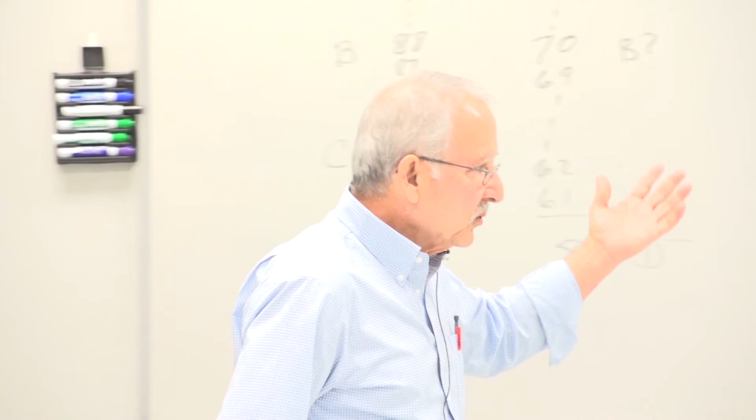As I said, today we will review the materials of ME218 and ME219. And rather than me going through something that I think you should hear, I would like you to tell me what you would like to be reviewed.

What is it that's murky? What was it that you didn't quite understand? Obviously, in less than an hour and a half, we can't go over the two courses in much detail, but we can pick a few subjects, 2, 3, maybe at maximum 4. In the previous class, I did 3. So we can pick subjects and then review those. But I want it to be the subjects you want reviewed, rather than those I would like to review.

Tell me what subjects you want reviewed. Finding stresses from strain values. In other words, the stress-strain diagram, is that what you're talking about? That's very simple, we'll do that.

Okay, what else? Mohr circle. Mohr circle, okay, let's write that. That's always one of the choices. What else?

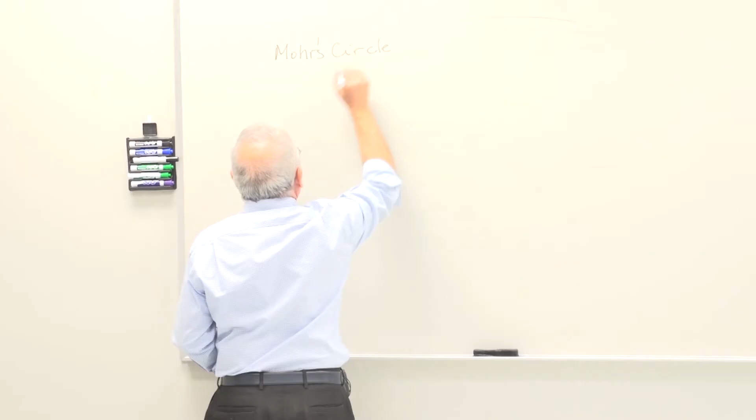So if you don't want any other subject reviewed, if I give you a quiz right now on combined loading, it's okay, right? I doubt that. So again, don't be bashful, you have to answer my question. You don't have to really, you can just sit there and look at me. But remember, if you don't answer my questions, I don't know what you don't know. You have to tell me what you don't know, or what you got questions on, and we'll answer those. So, anybody else want to be brave enough to say something?

Combined loading. I'm sorry? Combined loading. Combined loading, okay.

Anything else? Castigliano's theorem. Castigliano's theorem we will do in this class, independent of what you studied. In fact, the emphasis will be on Castigliano's theorem. Anything else? Transverse shear and bending. Transverse shear and bending, okay.

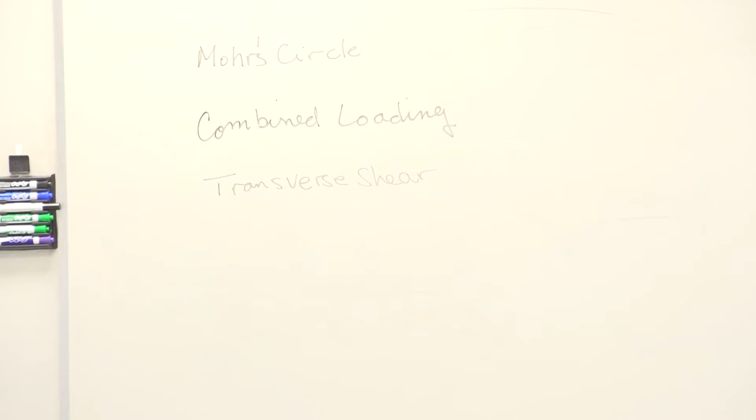Okay, let's take a look at these, and if we have more time, you can come up with other subjects as well. Take these one by one. Actually, I'll answer your question first, because that's simple enough.

If you're asking how we find stresses from strains, and if I have misunderstood your question, please let me know. That's a stress-strain diagram for a ductile material. A part of that diagram is linear and elastic. In other words, when you load the material in this section to some value, there will be some strain associated with it. And if you unload it, the unloading will be exactly on that very same line. So that when you completely unload the material, there will be no effect on the material properties. It is as though you never loaded the material. It's as good as it was before.

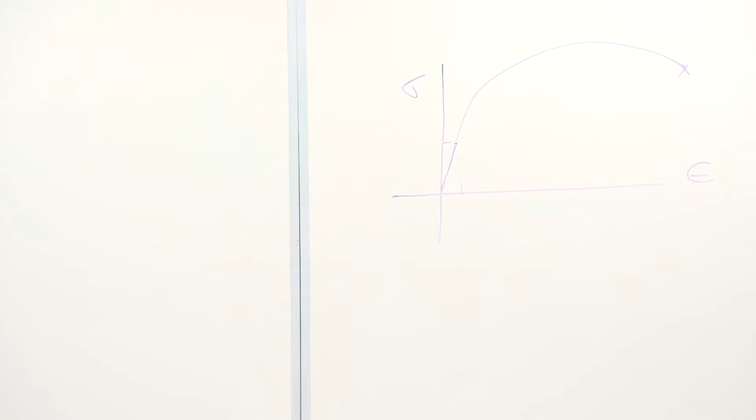If you go beyond a point, actually there are 3 points. One is called proportional limit, the next one is called elastic limit, and then we define this third point as the yield point. In a stress-strain diagram such as the one on the board, it is conventional, it's arbitrary—well, not arbitrary, but conventional—that we say the yield strength of the material is a stress for which the strain is 0.2%, 0.002. It's called 0.2% offset yield strength. And that's what we use.

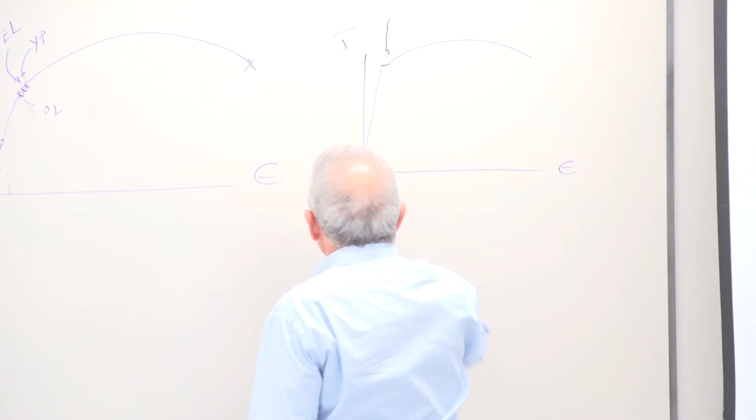The stress-strain diagram in the material may look like this as well. If you're in this, you just passed that point, you have definitely passed the 0.002 mark. So we say this is the yield point of the material. And there's a little upper yield point and lower yield point. Those of you who have taken materials, ME315, probably saw that in your studies.

If the stress or strain is in the linear elastic region, then you can use this equation, where E is the slope of that line. That's where stress and strain are proportional. So if you have strain, you can use that equation and find stress, and vice versa. Alternatively, if you know the value of the strain, you can put it in here, come up, and read the value of stress. Either of the two will give you the answer.

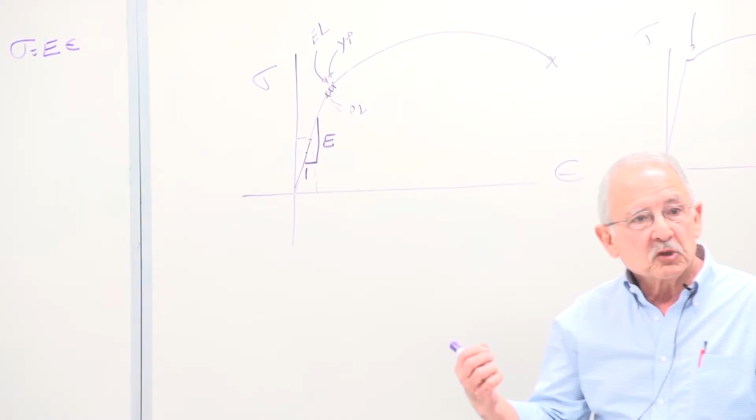This one probably with some approximation because you're going to have to read a curve. That one, I don't want to say it's more accurate, but you'll get a number that matches the equation. If, however, the strain is not in the elastic region, you have strained the material past the elastic limit and the yield point, and you're out here somewhere, that equation is no longer valid. You cannot use that equation anymore. The only way to do it, if you have the stress-strain diagram, is go up here, come in here, and read the value of, let's say, sigma 1, epsilon 1.

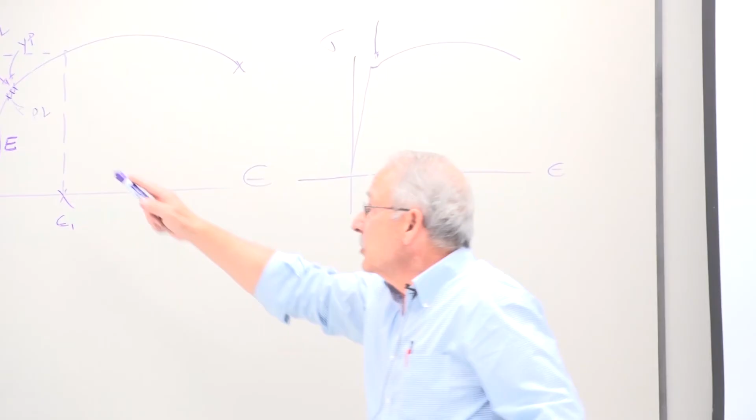Is that your question? Yeah, that's what's wrong. Thank you. Are you sure? Okay, all right, but that's about it. Just make sure you don't use that equation in the inelastic region. You have to use the graph, or sometimes you find actual equations for that part, then you can use that equation. Of course, it will not be linear, it will be a nonlinear equation. But you can use that equation. Okay?

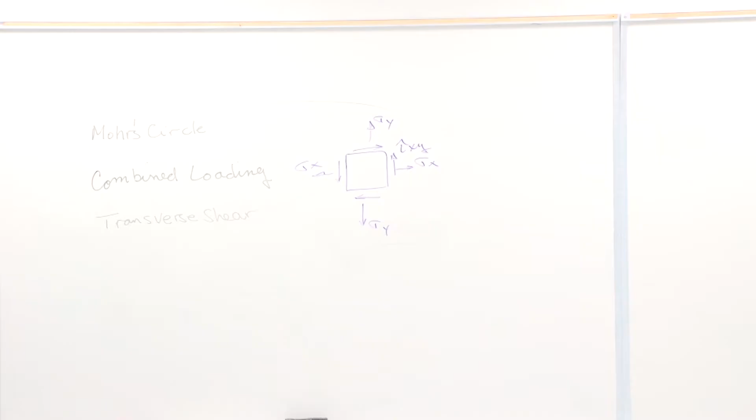These are stresses where you solve for a point, whatever critical point you will. These are stresses at one point in the material, not an overall stress, just one point. So this square here shows you a point, similar to this.

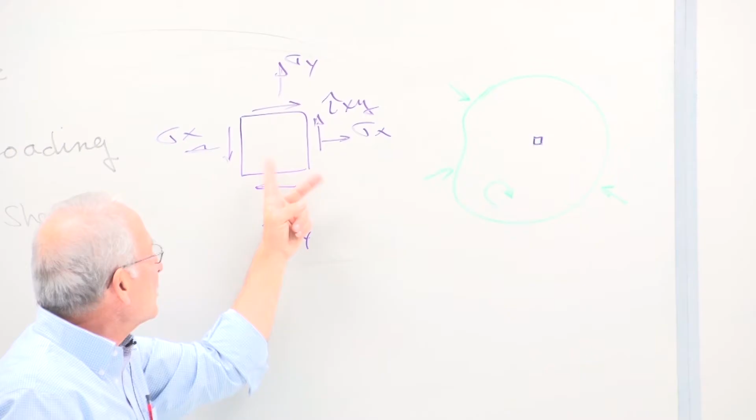Let's say you have all of these forces acting on this object, whatever it is. We pick this point and represent it by this little square. The stresses on the sides of this little square are shown here. These dimensions are very, very small. This is a point. So arbitrarily, we've taken our x and y axes like this: horizontal x direction, vertical y direction. Agreed?

But what if, instead of drawing a square like that at that very same point, I draw the square like this? I don't want to draw it right on top of that point, but this is for the same point. What if instead, I draw a square like that, and here are my axes, x prime, y prime. That's that very same point.

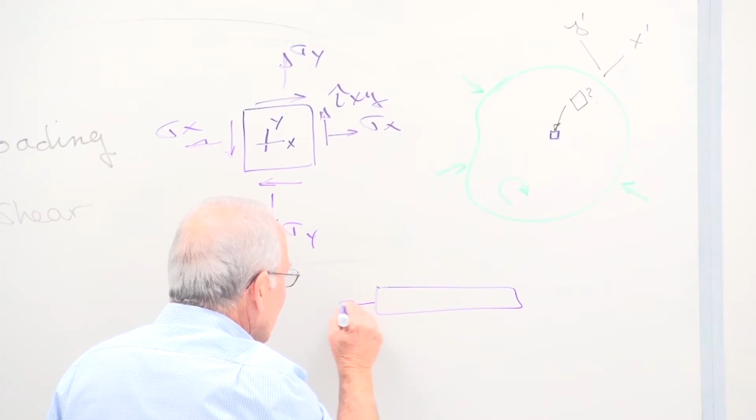I'll give you a simple example you're all familiar with. If this is 10 KSI stress, and I make a cut here, and I take a look at this cut section, what's the stress here? 10 KSI. Because assuming the dimensions have not changed, it's the same force being transmitted from here to here, and that creates the same stress if the areas are all equal, F over A.

But what if, rather than making this cut, I make that cut? Now I'm looking at this. I have these two stresses, this is my x prime and y prime direction shown there. This normal stress here, call it sigma prime, tau prime, is no longer equal to 10 KSI. It's something else. And as I change this angle of cut, theta, let's say, that stress changes. Therefore, the normal stress and the shearing stress are functions of this angle.

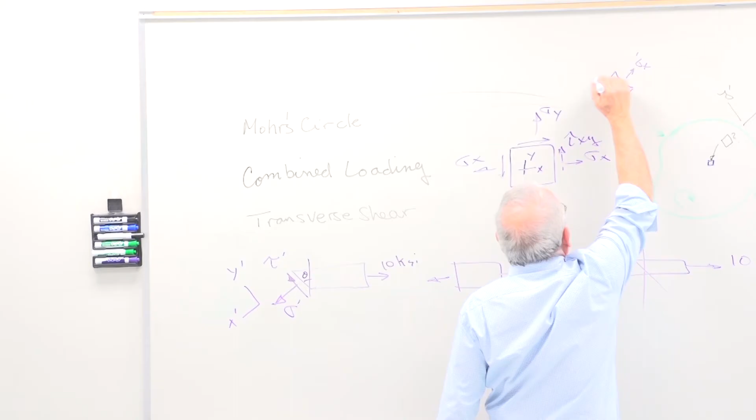If we can go from this set of stresses to that set of stresses, something like sigma x prime, sigma y prime, and tau xy prime, and the same on these sides, of course, if I can come up with a set of equations that will take me from this set of stresses to that set of stresses, I will have found the transformation equations for stresses. So these are all stresses at the same point at various angles, and the transformation from one set to the other is called stress transformation.

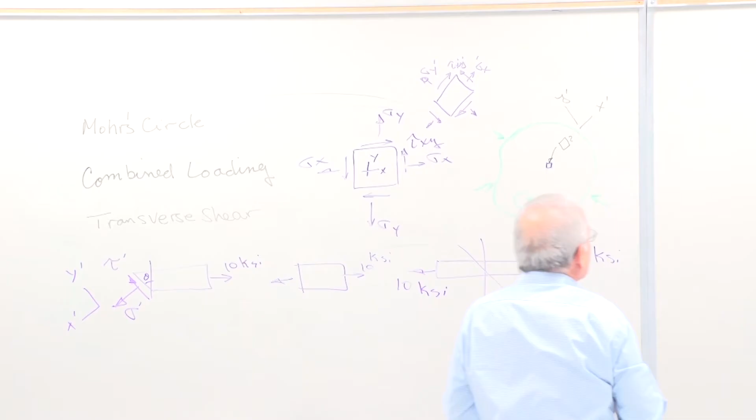How do you do that? Well, pretty simple. All you do is you take that element and say, what is this angle here? Theta with the vertical, so there's the angle theta. And we take a look at this little triangle. We have sigma x, tau xy, sigma y, sigma x prime, tau x prime y prime. This is all at one point. Once we look at it like that in these directions, once we look at it like that in those directions, but it's all at the same point.

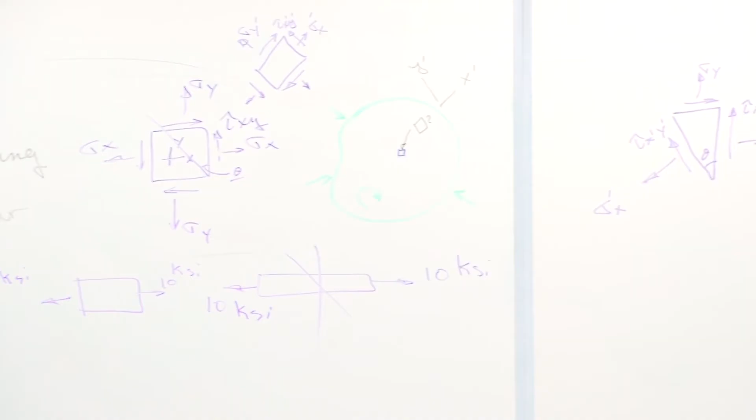To get to the transformation equations, all you have to do is use equilibrium equations. This tiny body here, which is at a point, must be in equilibrium. And remember that equilibrium means the summation of forces are zero, not stresses. Don't add stresses, you must add forces. Meaning that if you want to use equilibrium equations, you have to multiply each stress by its respective area on which it acts. So for example, to find the force that acts on this area, you multiply sigma x by this area. Remember that this is an area into the board.

You say, well, what are those areas? Well, really doesn't matter that much. I can call this area A, then that area would be A cosine theta, and that area would be A sine theta. The thickness is the same in all cases.

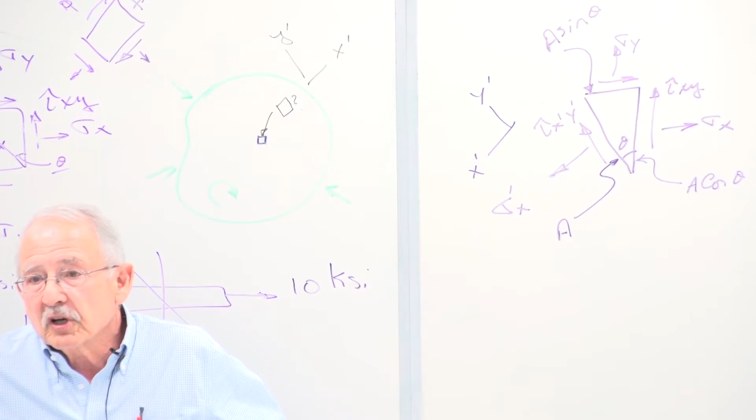You multiply them by the respective areas, write an equilibrium equation in the x prime direction, and write an equilibrium equation in the y prime direction. In each of those two equations, there will be one unknown. In the summation of forces in the x prime direction, sigma x prime is the only unknown, and the other unknown stress will have no component in that direction. In the summation of forces in the y prime direction, there will only be one unknown, and this will not have a component in that direction.

So when you write these equilibrium equations, square them, add them together, and simplify them trigonometrically, what you will find is the equation of a circle. That circle is called Mohr's circle. All it does is represent the results of these equations, called transformation equations, graphically, and make the solution of problems a little bit simpler. Rather than using those equations, we use Mohr's circle.

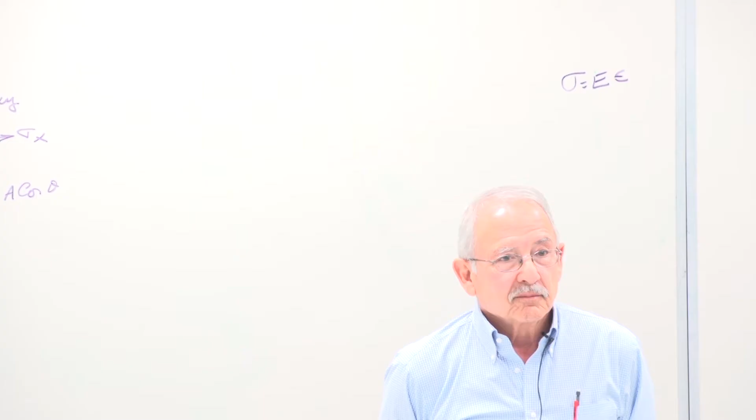So, if we have a set of stresses like that, and we want to find these, here's what we do. Take a set of axes, sigma and tau, and we plot the stresses at this point on the vertical plane and on the horizontal plane. On the vertical plane, there's a normal stress sigma x and a shear stress tau xy.

Normal stresses are positive if they're tension, they pull on the material, and negative if they're compression. As for shear stresses, remember, this is all at one point, so there has to be only one shear stress at this point. There can't be two or three, just one shear stress.

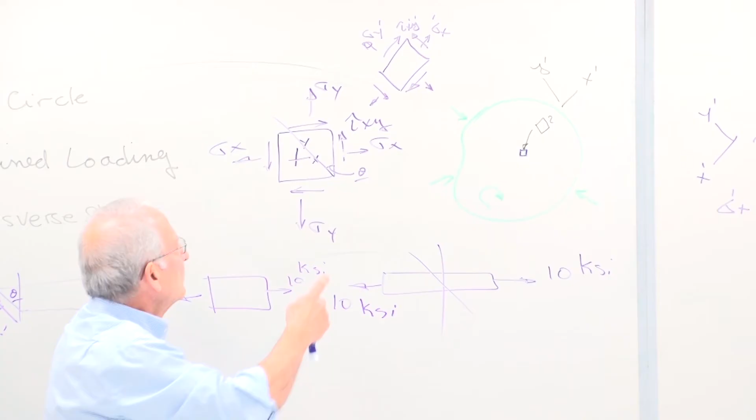But for the construction of Mohr's circle, we have a special convention whereby we think of these two shear stresses as two forces and say: if they produce, about the center, a counterclockwise moment, then they're negative; if they produce a clockwise moment, then they're positive. By that convention, this is a negative shear stress, and that's a positive shear stress. That really doesn't make sense, because at one point you should only have one shear stress, positive or negative, period. But in order to draw Mohr's circle, we use this convention, and it works.

The sign of shear stresses as well as normal stresses—I'll talk about that probably next week sometime. There is a way to find the sign of shearing and normal stresses using the same approach, and you don't have to worry about clockwise and counterclockwise. If you do use that approach, both of these shearing stresses will be either positive or negative, as the case may be. But for Mohr's circle, we use this convention.

Okay, so let's just give these some numbers. Say this is equal to 4 KSI, that's equal to 3 KSI, and my shear stress is equal to 2 KSI. Let me erase the top element so these will not be so cluttered, and this too.

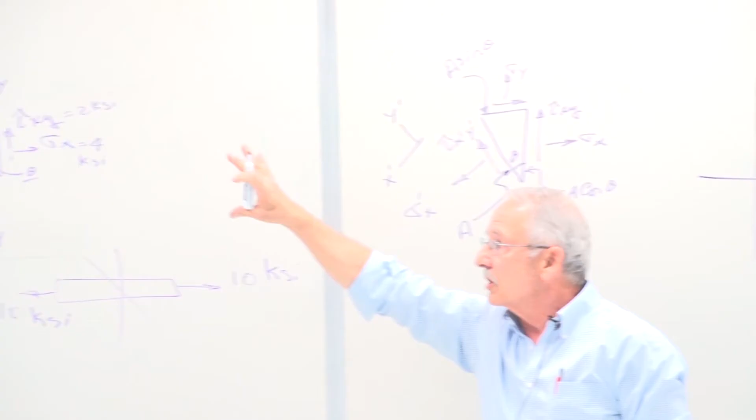So let's draw Mohr's circle for that, and then take a break. On the vertical plane, we have a normal stress of 4 KSI and a shearing stress which, according to our convention, is negative—counterclockwise, sorry, negative. This point, which is a point on Mohr's circle, represents the stresses on the vertical plane. It is sigma x, but sigma x is acting on a vertical plane, a plane parallel to the y-axis, so we'll call this the vertical plane.

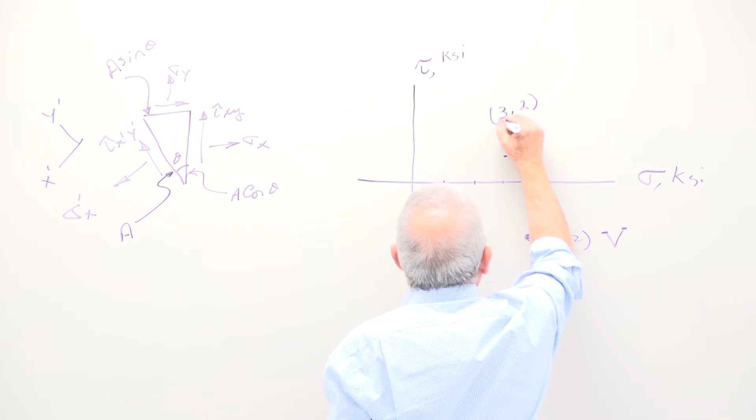Similarly, on the horizontal plane, we have 3 KSI and 2 KSI. This is going to be tight, but that's okay—3 KSI, and that time positive 2. Stresses at these points, 3 and 2, represent the horizontal plane. These two points are the endpoints of a diameter of Mohr's circle. So if I connect these two, and draw a circle like that, that's Mohr's circle.

Just like these two points represent the stresses on the horizontal and vertical planes, all other points on Mohr's circle represent the stresses on all other planes passing through that point. Therefore, if we know the orientation of those arbitrary planes, we can find the stresses on them by using Mohr's circle.

Now let me find the maximum and minimum here, and then we'll take a break. You can see that if I calculate the radius of Mohr's circle—and it's not very difficult to calculate—it's the hypotenuse of this little right triangle. The distance from the center of Mohr's circle to the tau axis is 3.5 KSI.

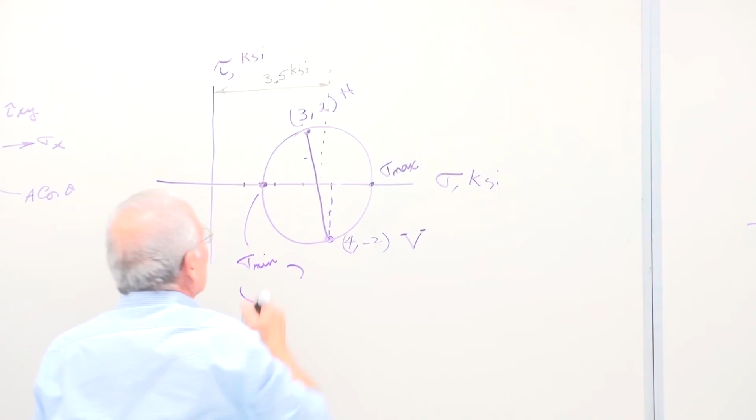Student: The max stresses, those are for this plane, correct? Instructor: Correct, I'll get to that. Student: Are we going to learn plane stress, plane strain later, or is this part of the review? Instructor: This is plane stress. Student: You mean three-dimensional? Instructor: Yes, I'll talk about that today—I'll extend this Mohr's circle to three dimensions. That's why I have parentheses here; these parentheses are for in-plane. Now that you asked the question, we'll put them in.

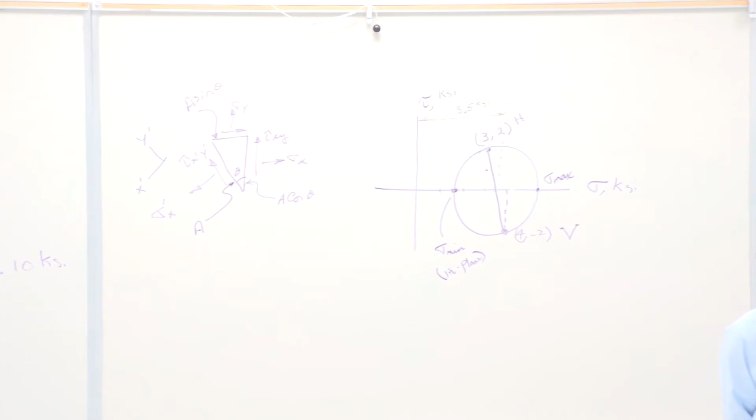We have stresses on other planes as well. The sigma max and sigma min are called principal stresses. So what is the definition of principal stress? We have no shear stress, that they act on planes of no shear. Not that they should be either maximum or minimum.

Although that's partially true, maximum and minimum stresses are included in the principal stresses, because as you can see, the shear stress here is 0. The shear stress there is also 0.

But look at this three-dimensionally. This is our sigma x, tau xy, and sigma y, right? What's the shear stress on this plane, the plane that I have put a circle in?

At that point, this is one point. Remember this, this whole cube is one point. Oh, I thought you meant at the principal, at the angle of the principal stress. No, I'm not looking at the angle of the principal, not yet anyway. What I'm looking at are the principal stresses themselves.

What are they? They're stresses that occur on planes of 0 shear. Correct? They're oriented at some angle here. So if I were to draw them on this, I won't draw them right on it, but probably they would look like that, this on top of that. See, like so. Those would be the planes on which the principal stresses will act. But this is that. This is 4, that's 2, that's 3, and so on.

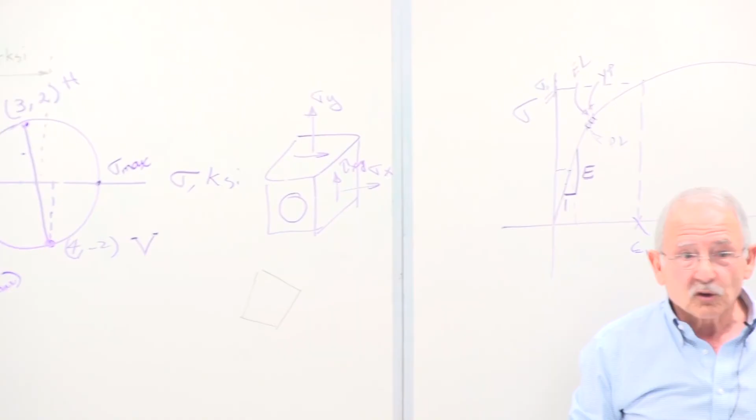What's the shear stress on this plane? 0. You don't see any loads. What's the normal stress at that point, on that plane? Also 0. You don't see any normal loads either. You don't see any loads perpendicular to that plane, you don't see any loads parallel to that plane. There is no normal stress on that plane, there is no shear stress on that point. Therefore, 0 is a principal stress, because it acts on a plane of no shear.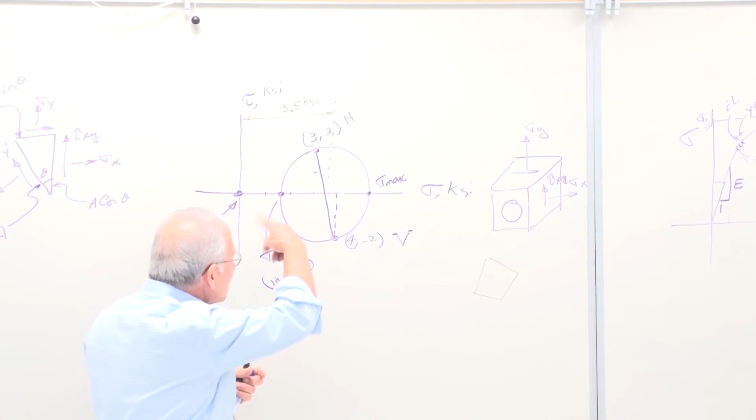So coming back here, that is our real minimum principal stress, not that. And if you take a look at this cube, this element, three-dimensional element, from the 3 sides, for each side you get a Mohr circle.

Before I draw those, one more thing: the maximum shear stress, and I'll rewrite the values for these after you come back from the break, but the maximum shear stress is that, isn't it? That's the maximum shear stress, in plane shear stress.

So if I have these principal stresses, I will have the ends of Mohr's circles. These two have given me one. These two will give me another one. And these two will give me another one.

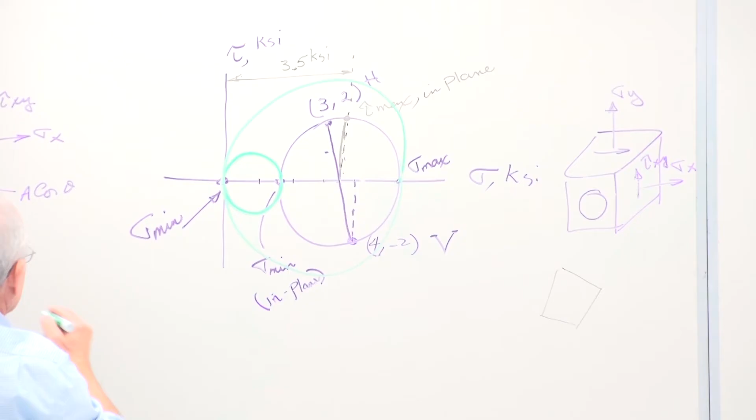And the radius of that large green circle is the real maximum shear stress, not the in-plane one. So tau max is the radius of this big circle. Tau max, therefore, is sigma max minus sigma min, not in plane, just sigma min, sigma max minus sigma min divided by 2. The radius of the largest Mohr's circle.

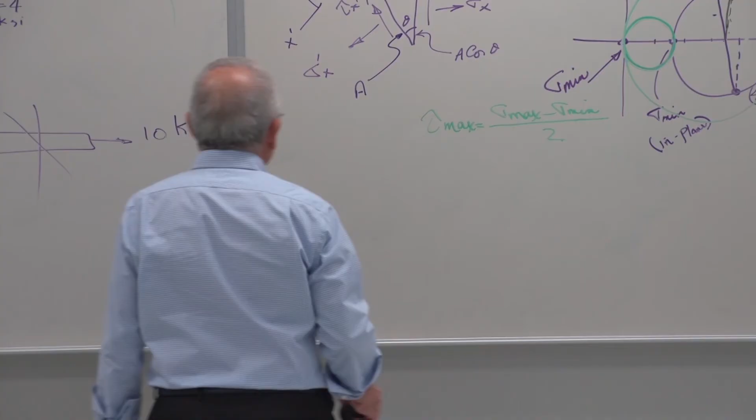Now, any questions so far? The location of the principal stress, meaning the angle at which the plane of the principal stress acts, can be found if we find either of these two angles, either this one or that one. Of course, they're both exactly the same.

So how does that tell us what the principal stress is? Let's assume, and I'm not going to go through finding that angle, that's simple enough in a right triangle, you can do that. Let's say that angle is, I don't want to call it theta because I called that one theta, let's call it alpha.

Then, this point representing the vertical plane, or this radius representing the vertical plane stresses, if it is rotated through this angle, call it 2 alpha, you recall that the angles on the element are doubled on the Mohr circle. Therefore, I'm calling that 2 alpha.

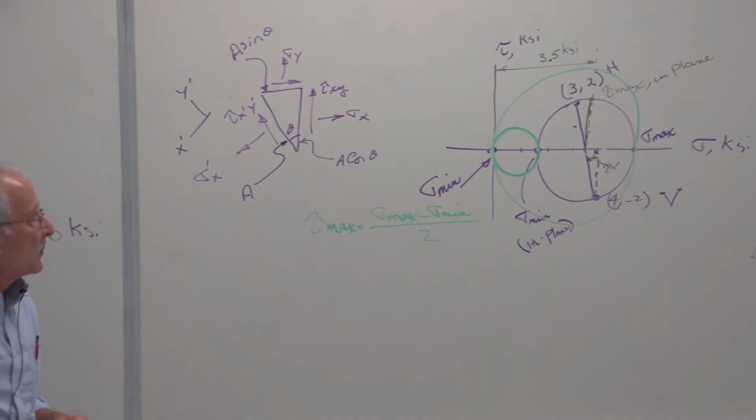If I rotate the vertical plane radius counterclockwise 2 alpha, I will get to the plane on which the maximum principal stress acts. So if I am to draw that here, and notice that I took the vertical plane counterclockwise 2 alpha. Take the vertical plane counterclockwise alpha. Counterclockwise alpha means like this. This is the plane on which the maximum principal stress acts.

Notice that the maximum principal stress and the minimum in-plane principal stress are 180 degrees apart in the Mohr circle. Therefore, they'll be 90 degrees apart in the actual element.

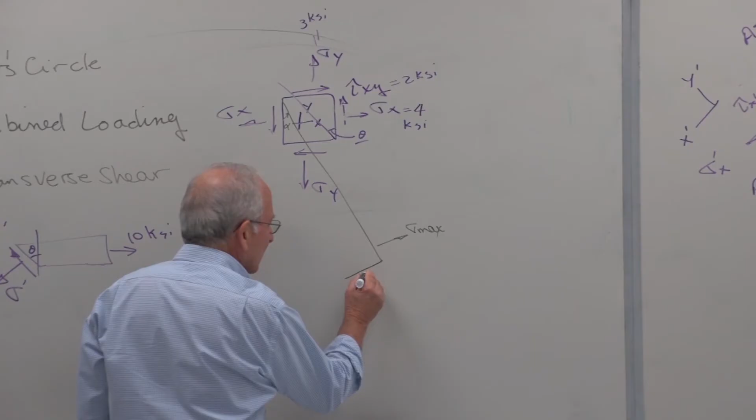In other words, if you were to draw an element, it would look like that.

Sometimes they include the maximum shear stress in this sketch as well, because the maximum shear stress is located 90 degrees from either one of these. That's the in-plane maximum shear stress, 90 degrees from each one, so 45 degrees.

So if I want the maximum shear stress to be shown here as well: 45, 45, sigma max, sigma min, in plane, and the maximum shear stress.

So the maximum shear stress depends on whether you rotate clockwise or counterclockwise. You can come up with the direction. And there's a normal stress which acts on that plane of maximum shear stress, whose value is this, in our case 3.5.

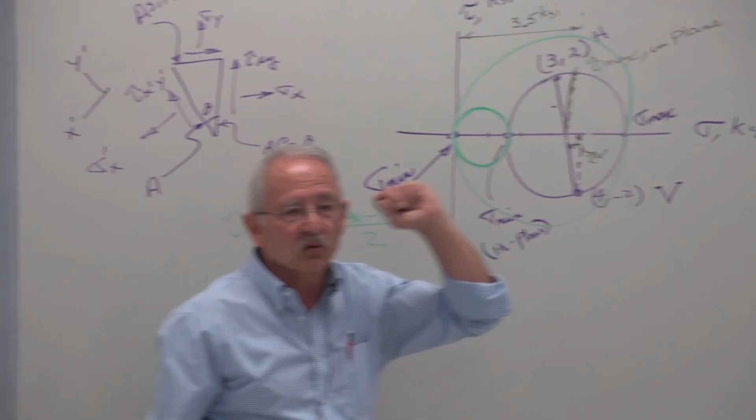The magnitude of the principal stresses can be found again by looking at that in-plane Mohr circle. For example, sigma max is 3.5 plus a radius, sigma min is 3.5 minus a radius. So sigma max, in our case... and of course the maximum in-plane shear stress is just equal to the radius.

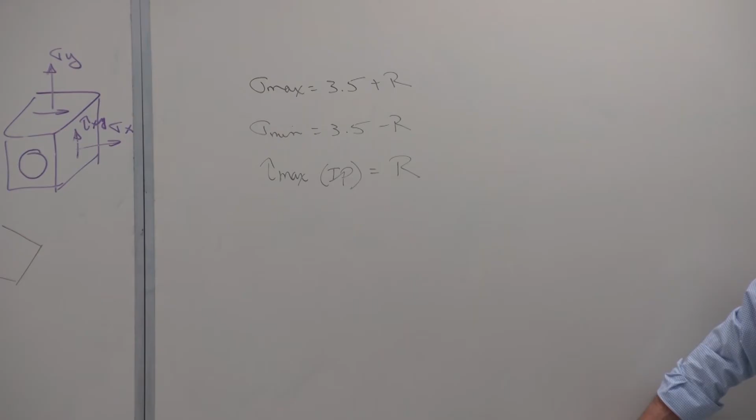Okay? Any questions? Whoever asked for Mohr circle, I forgot. Have I answered all of the questions, or at least the vast majority that there may have been? If not, if there's something regarding Mohr circle that is still not clear, tell me. Nothing comes to mind, huh? If it comes to mind later, ask later. Not a big deal. Next subject, combined loading.

Whoever asked this question, do you have anything in particular in mind? A problem, for example, in combined loading. Who asked the question? You did. Do you have anything in mind? No. Nothing in mind. Okay, no big deal.

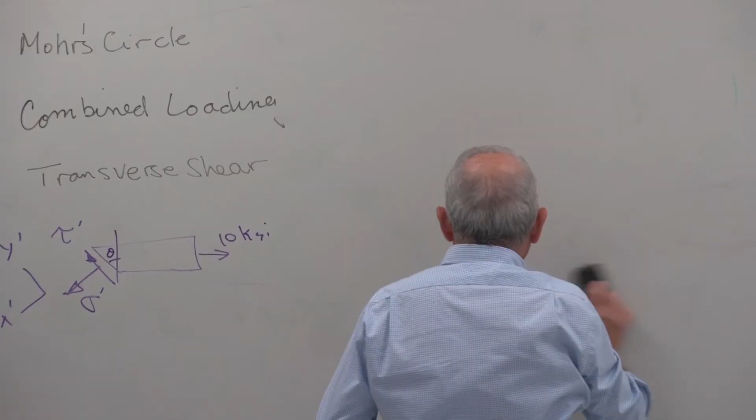Let me then give you a problem. We did this in the previous section as well.

Say you have a shaft like this, and you have pulleys.

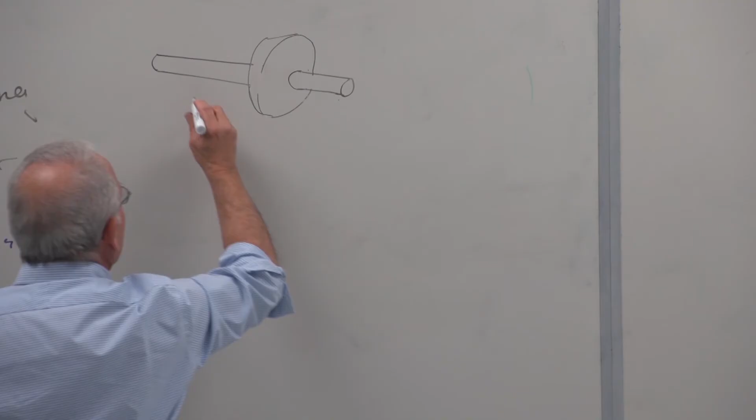You have to live with my artwork, it's not the best in the world for sure, but starting next time I'll be using the projector and things will look much better.

Okay, let's say it's simply supported here and here. And you have loads on the two sides of these pulleys. Just give them some numbers.

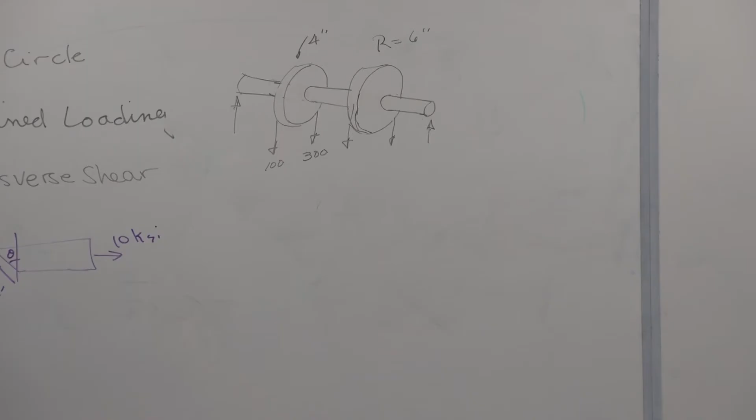Let's say... and let us assume that the radius of this pulley is equal to 6 inches, and the radius of that pulley equals 4 inches. So that's 200 times 4 is 800. Let's make it 8 here so that I can do this.

Forces in pounds, and distances, I'll put them in here like this: 2 feet, 3 feet, 2 feet. Just to have taken some number. Is that clear?

Especially the last part where I'm showing the length along the member. This is the location of the two pulleys. Those are the distances in between them.

One of the things that you have to be sure of, and if given in a problem, for example, something like this, and this load is not given, so F, the first question is, what's F?

Even though this is a shaft and it rotates, it must be in equilibrium. You do know that equilibrium does not mean the state of the material being stationary, not moving. That is not what it means. It can be, but it doesn't have to be. Any motion has to be with constant speed, whether rotational or linear.

So in this case, if it's constant speed, then that means that the torque that's being applied on the two sides by these two pulleys must be equal. So if these are my axes, and if I call this pulley 1 and that pulley 2,

the forces on pulley 1 create a torque equal to 200 times 4 inches. I say radius 4 inches, that's okay. 200 times 4 inches, that's 800 inch-pounds.

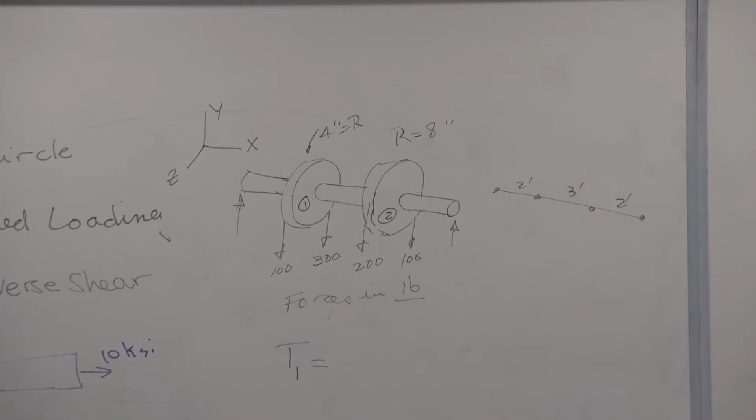And if I were to write this in vectorial notation, what would be the unit vector? Minus I, exactly. Does everybody understand? Okay, good.

Pound, inch, in pounds, all the same as a vector. The torque generated by pulley number 2, by necessity, has to be 800 pound-inch. Otherwise, there will be no equilibrium. The two must be equal.

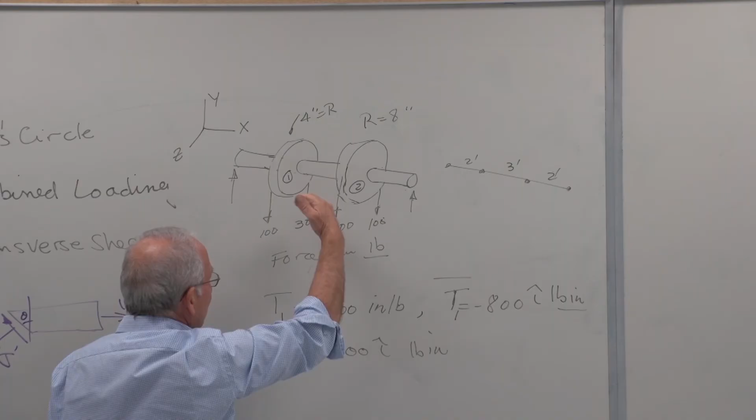So, if only this force is given, you can find that other force. So this is 200 times 8, 1600. You have to subtract 800 from it, so that must be 100. Does that make sense?

That okay with everybody? If you take a look at that, it will also give you 800 pound-inch, except that it's in the positive x direction. Positive I. Okay.

And let us assume that the question is this: what is the location of the maximum stress in this shaft? And what are the stresses at that location?

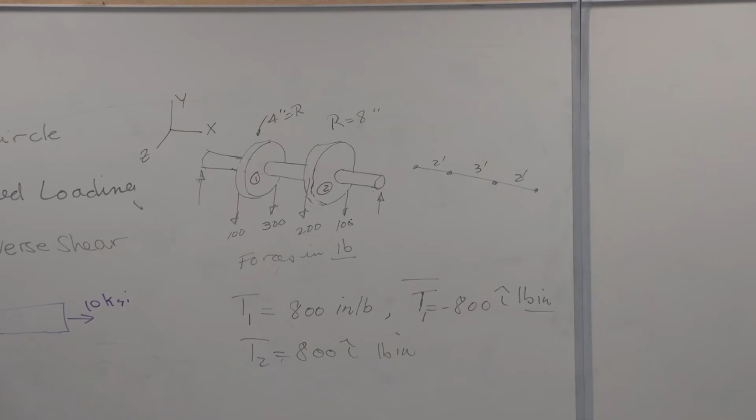By location, we mean cross-section and a point which is usually on the outside of the shaft, because that's where both the shear and the normal stresses are generally maximum. That's not the case if there is stress concentration, of course, but not in this case.

So, if that is the case, what part of the shaft should I be looking at in order to find the location of the maximum stress or stresses? First, what about the shear stress? Where does it act? Maximum shear stress.

I'm not talking Mohr circle, just talking your regular old shear stress from the TC over J equation. Where does it act? Around the center of the shaft? Remember the stress distribution?

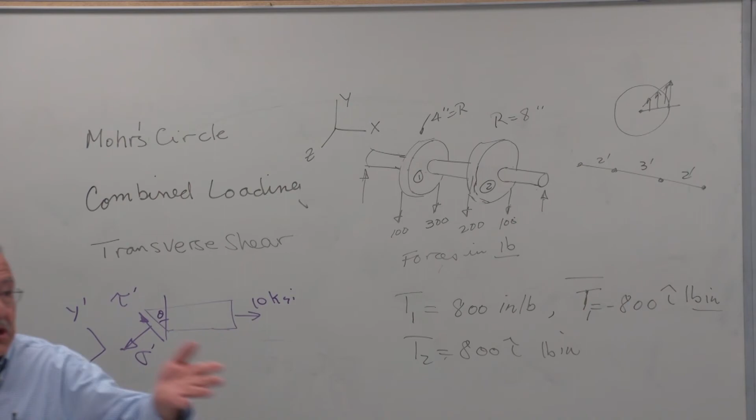At the outside of the shaft. But where in the shaft? Here, here, or any other point in between, or section in between? Where does the maximum shear stress occur?

I hope you're just bashful, because that you should be able to answer. What's the torque here in this section? Zero, there is no torque. That section, zero, in between.

So the maximum shear stress occurs from here to here. It occurs on the left-hand side, immediately on the left-hand side of pulley 2, or immediately on the right-hand side of pulley 1, and every place in between those two.

However, the shear stress is not the only stress that acts on this shaft. There is also a bending moment, which creates a normal stress. In order to answer what is the most critical section of the shaft, not only do we need the maximum shear stress location, we also need the maximum normal stress location. To do that, you have to draw a shear moment diagram.

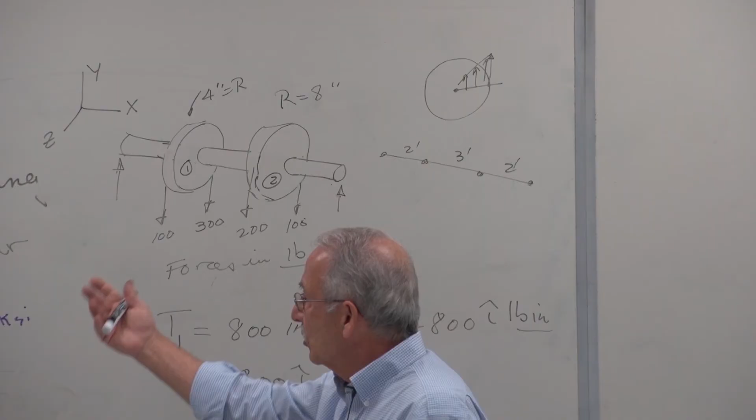So this would be a good exercise in that as well. We draw the shaft like this. And then we have 400 pounds here and 300 pounds there. And this is 2 feet, 3 feet, 2 feet.

You can draw shear and moment diagrams, which is really not that big of a deal. For the shear diagram, you just follow the load. Go wherever the load goes.

First, of course, you have to find the reactions. Let's see, that's 4. Yeah, it'll work for one, but not the other. I want to change those numbers. I don't remember the numbers from the previous section. I want to change those numbers so that we get round numbers for the reactions. If I make that 4, then I get 3 and 1, and if I make that 4, I may get 3 and 1. It may turn out to be okay.

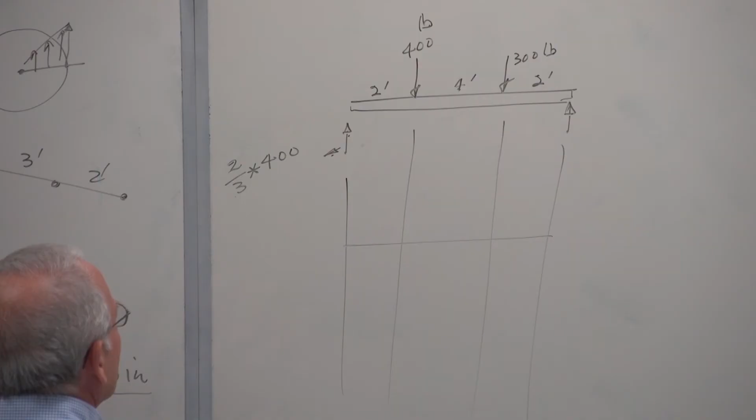Let's see, I don't want to write equilibrium equations just yet. So I'll show you where I get these numbers. That's 6, 2, so 1/3 and 2/3. So this is equal to 2/3 of 400. And that's equal to 1/3 of 400.

Then this will be equal to 2/3 of 300, 1/3 of 300. If you add those two, those should be the reactions. So it's 100 plus 800 over 3. And this is equal to 400 over 3 plus 200 pounds. We'll figure out what they are.

Now that we're on the subject, let me show you how you get that. If you have a simply supported beam, which that is, if this is a force F, this is A, and that's B, yes, you can write equilibrium equations and find the reactions. But if you remember this, the easy way is to say that this is divided between these two supports in the ratio of these two distances. And it's clearly the reaction due to that force is larger at the left side than it is on the right side. Therefore, this will be A times F divided by A plus B.

That's what I've used to come up with that. So I looked at each one of these like that, and for each I wrote its own ratio, and then I added them up. But again, if you're more comfortable with equilibrium equations, that's fine.

Furthermore, the maximum moment, which occurs here, this is the moment diagram, maximum moment is that. All you got to do is cut a section here, and the moment just next to F is equal to A times that, or on the other side, B times that. So those are your moments, the maximum moment and also the reactions for a simply supported beam. This is something good to have in the back of your mind, saves you a lot of time.

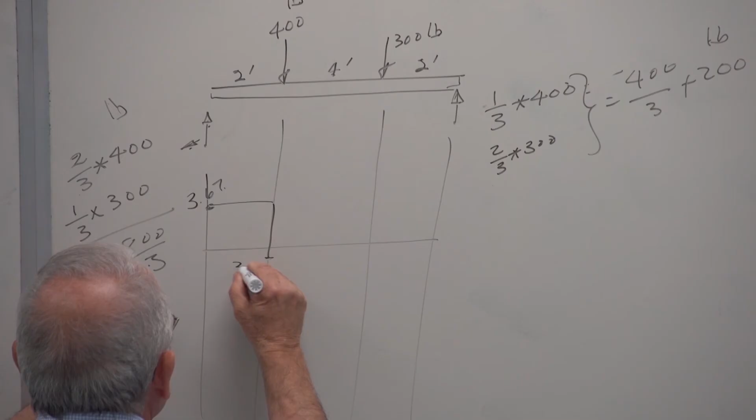So what is this? This is 800 over 3, so it is about 267 approximately, plus 100 is 367. And then from here to here, nothing, so we drop down to 33. And then nothing from here to here, I'm following the load. And 333. The sum of these better be 333. It is, right?

Student: Sir, how come it's 2/3 instead of 3/4? Instructor: I'm sorry, come again please? Student: Because isn't the distance 6 over 8 instead, when you use that shortcut? Instructor: No. Oh, what? Let's see, it's 2/8. Yeah, you're right.

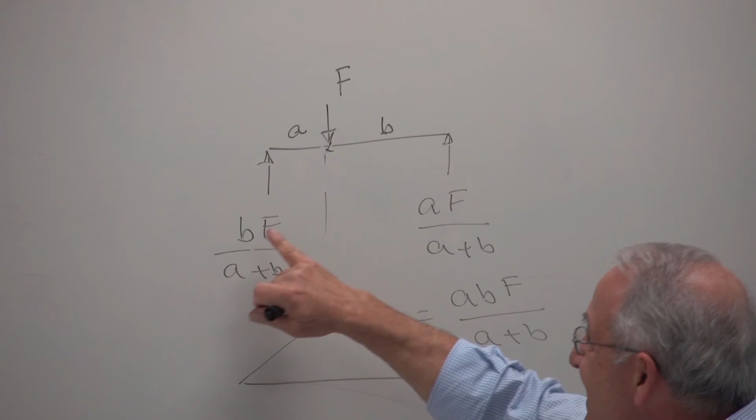I divided it in the ratio of these two. So here's what I did. This has to be divided into these two parts, right? Okay, this one, or this one, is A over B times that one. Ratio of those two, A and B. Correct? So coming in here, the ratio is 2 to 6, 1 to 3, okay, 2 to 6.

And then you do the moment diagram, which now it's actually not difficult to calculate. How do I go from this point to whatever this area, the change in... actually, let me write these for you here. I'll keep that there.

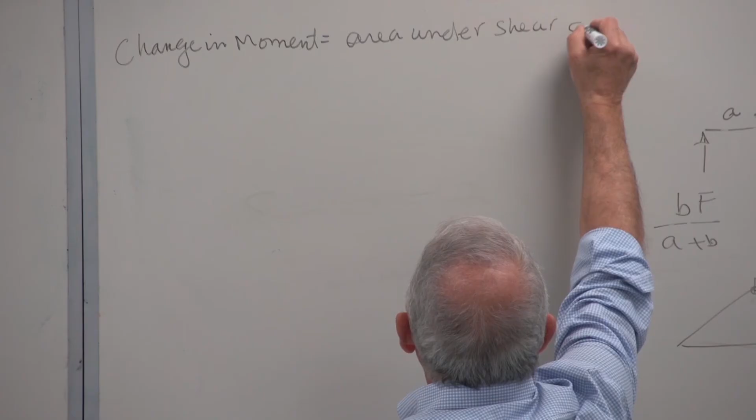Change in moment equals area under shear diagram, right? That's from the shear moment diagram.

So right when we started this problem, we established that there's shear force due to the torque, right? But there's also shear force due to just bending. Yes, there is. Our shear diagram doesn't care about the torque shear yet, right?

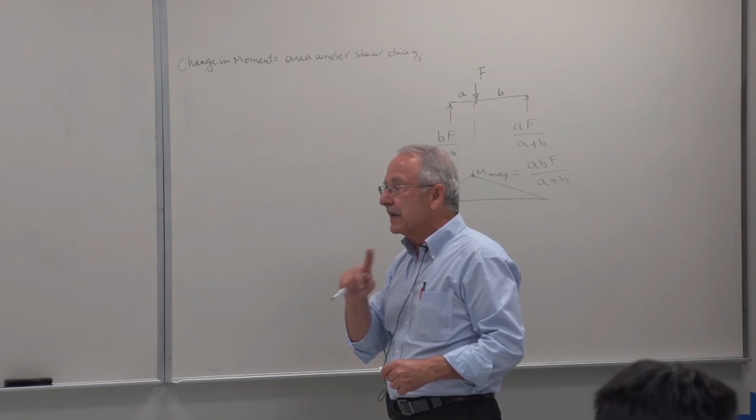There are two independent parts that produce shear stresses. Both of them produce shear stresses. Torque may not be there, but the shear stress from the bending diagram is there. On the other hand, that one may not be there, but the torque is there. But in general, both of them are there, so they're either additive or subtractive, depending on whether they act in the same direction or in opposite directions. That's number one. Number two, the...

Transverse shear, what is the value of the transverse shear at the surface? Zero. It's maximum at the neutral axis, right? What's the maximum value of the shear stress due to torque? Where does it occur? At the surface. Zero at the neutral axis.

Yes, there are these two shear stresses, and in some locations they add to one another. But at the point of interest that we have, on the surface, only the torque has a value. The transverse shear is zero. Remember, it looks like this - the variation of the shear stress. If this is your cross-sectional area, that's the transverse shear. Agreed? So it's zero on the surface.

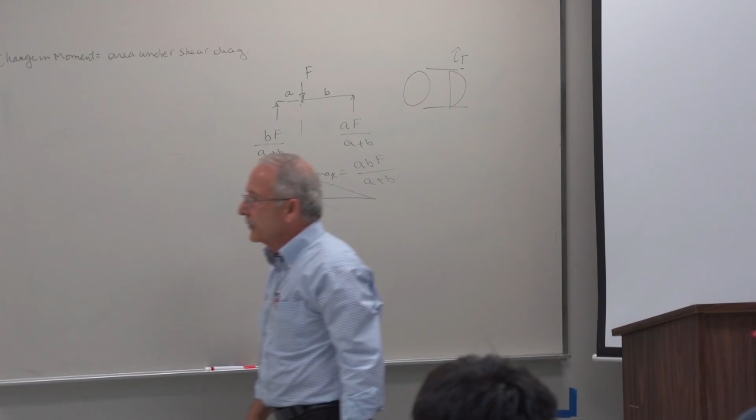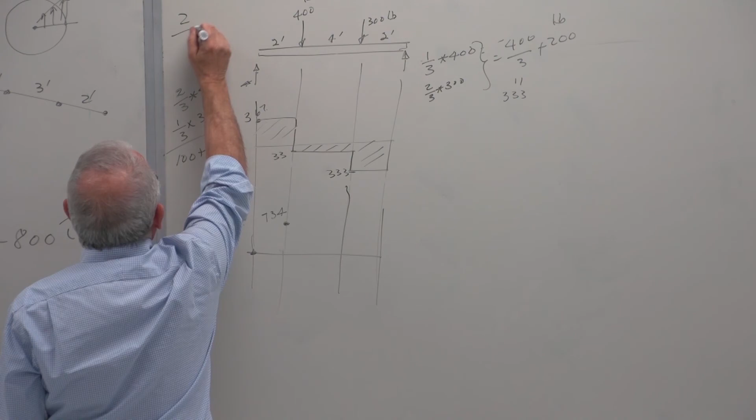Well, let's check the reactions. I believe what you said is correct. It's not 2/3. This one is 2 over 8 times 400. You were right after all.

And from the other one, you get 6 times 300 over 8. A divided by A plus B and B, yeah. In reducing the ratios, I made a mistake. So let's just check this one more time. So that's 800, that's 100. And what is that? 3/4, that's 900 over 4. And 900 over 4 is 225.

Add those two, and rather than 367, we will have 325. Okay, 325. That still won't give us the right answer. Isn't it 6/8 times 400 and 2/8 times 300? 8 times 2 divided by 8, 400 times 2 divided by 8. It's like in reverse, isn't it?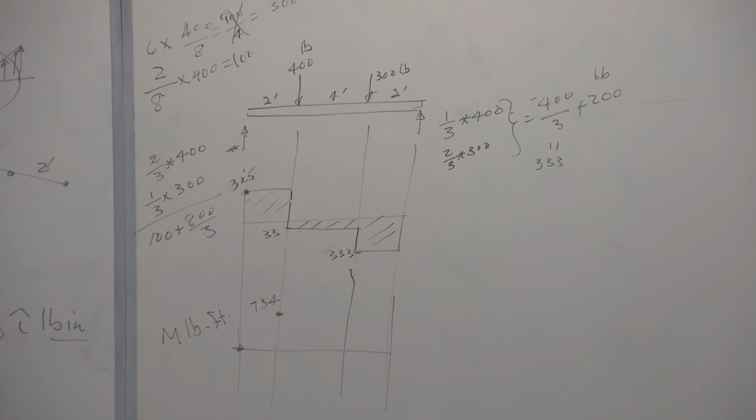400 over 8 and 6 times 400. That's right. Okay, one more time. We get 300, right? Is that right? And below it is 2 over 8 times 300. Yeah, that's correct. So 300, and then this one. Oh, I know, I switched those two. 6 times 400 divided by 8 is correct for that one, and 2 times 300 over 8 is good for this one.

600 over 8. So what do you get if you add those two? Calculator, anyone? Divided by 4 is 150, 75. Check that. Correct? So 375.

On this side, 400, 2 over 8, and 300, 6 over 8. And what do we get here? That's 50, that's 100. That's 100 plus 1800 divided by 8, what is that? Quickly. 2, that's 900 divided by 4, so 225. Is that correct?

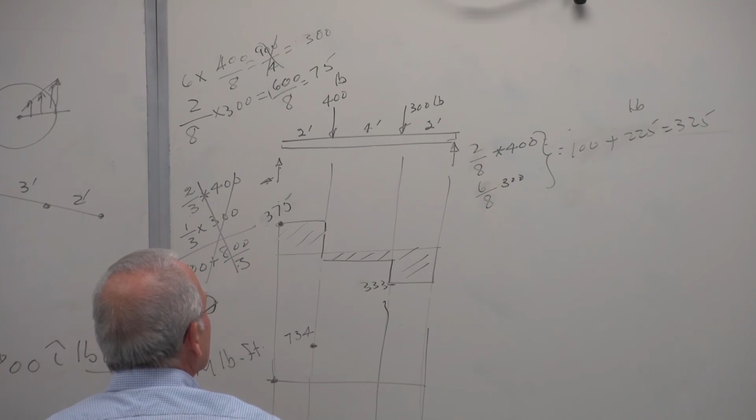Okay, now hopefully things will come out right. So 375, 25, 325. And the maximum moment here is this times 2, which will give us 750. And the maximum moment here is 325 times 2, 650.

Does everybody know where I got those numbers from? This times that, that times that. This times that gives me 325 times 2. 375 times 2 gives me 750. So how do I go between these two points? Straight line or a curved line?

Straight, why? Because the shear force is constant. So we go here, we go there, and then we go there, like that. So continuing on this.

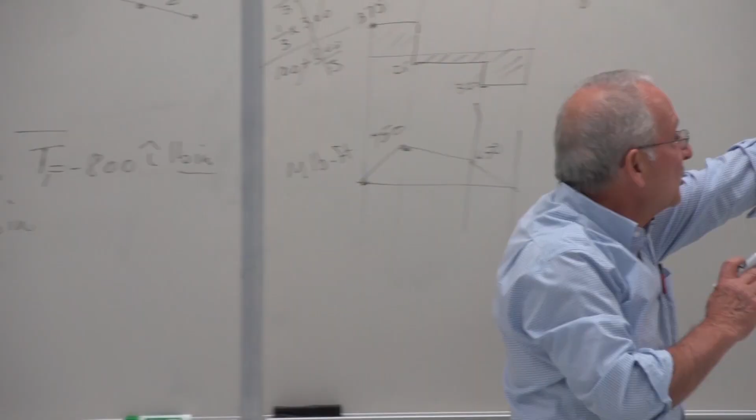Change in shear equals area under load diagram. Slope of moment diagram equals value of shear force. And slope of shear diagram equals value of load.

So the slope of the shear diagram here is zero because there is no load here. This is free of load. Slope of the moment diagram is constant because shear is constant.

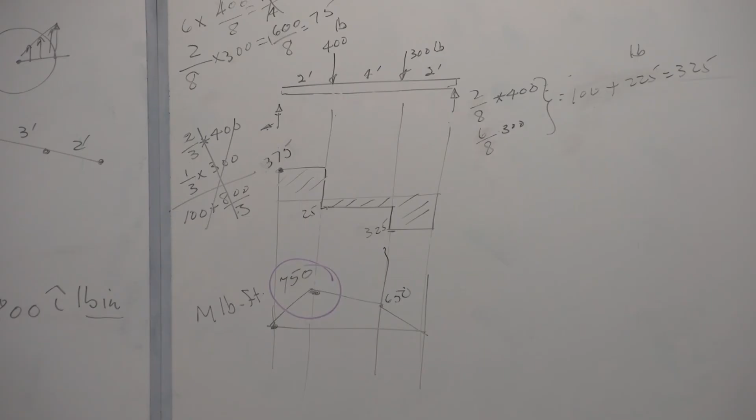So now you can see this is our maximum moment. We said the maximum shear stress occurred between here and here. Since the maximum moment occurs here, then we should be looking at this section, right there on the right-hand side of pulley number 1.

And sigma max will be equal to, in this case, 750 times C divided by I. C and I we don't have because I didn't give you the diameter of the shaft. Once you have these two, and tau, of course, we can calculate that.

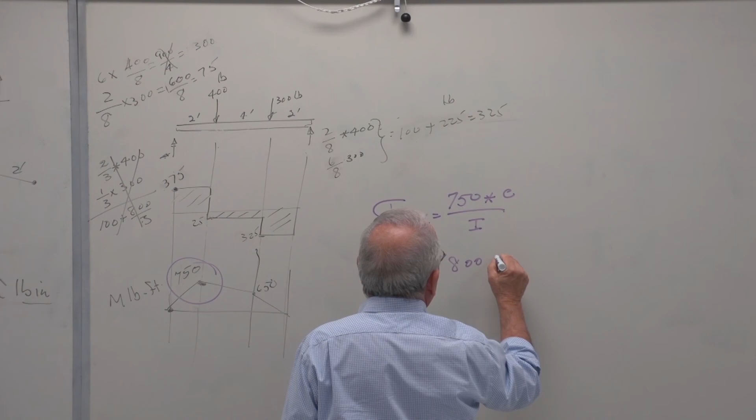Tau max, that means the tau on the surface, is equal to 800 C over J.

Once you have these two, you're back to Mohr's circle with your sigma x, sigma y, and tau xy. Except that, in this case, there is no sigma y or sigma z.

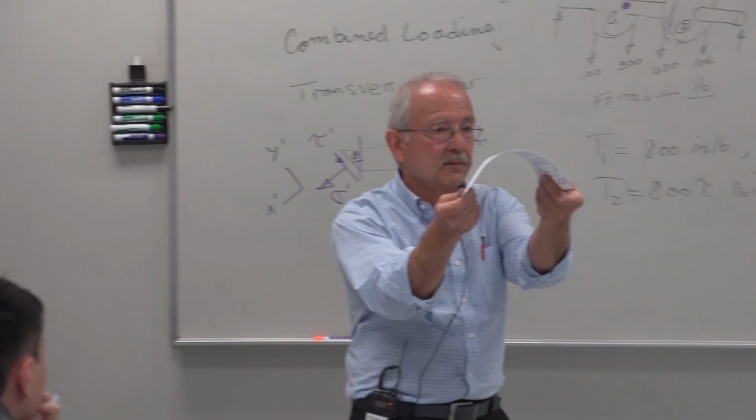Whenever you have bending of shafts, or bending in general, it doesn't have to be a shaft. It could be a square cross-section, rectangular, I-beam. If you have bending, the only stress is along the axis, normal stress, is along the axis of the shaft. It doesn't matter whether you bend it like this or like that, normal stress is always along the axis of the shaft.

So when you have shafts like this, with x, y, z axes, your only normal stress is in the x direction, along the axis of the shaft. There is no sigma y, there is no sigma z, so don't come up with those. Your Mohr's circle in this case, or rather your element, will be one normal stress and one shear stress. And this is sigma x, in our case.

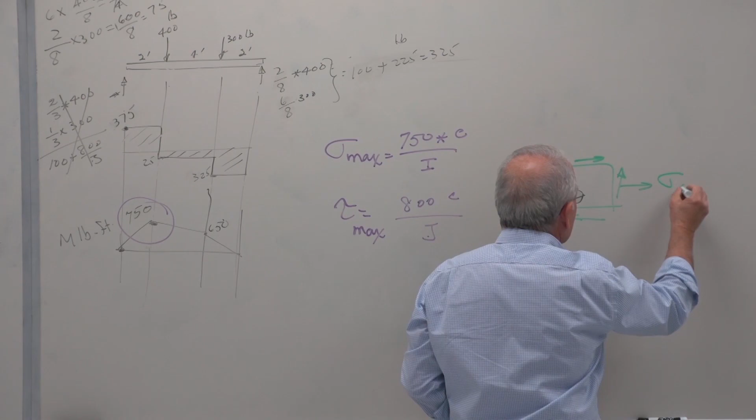Now, what if, rather than these loads being like that, they were like this? Still simply supported, and you have a load here like so, and a load here like so. The two loads are not in the same plane. One of them is in the y direction, the other one is in the z direction. So this is your x-axis, that's the load in the y direction, load in the z direction. You guys did that in 219, right?

Yes? Sure you did. So what you do in this case is draw two moment diagrams, one for each of these, and you end up with something like this.

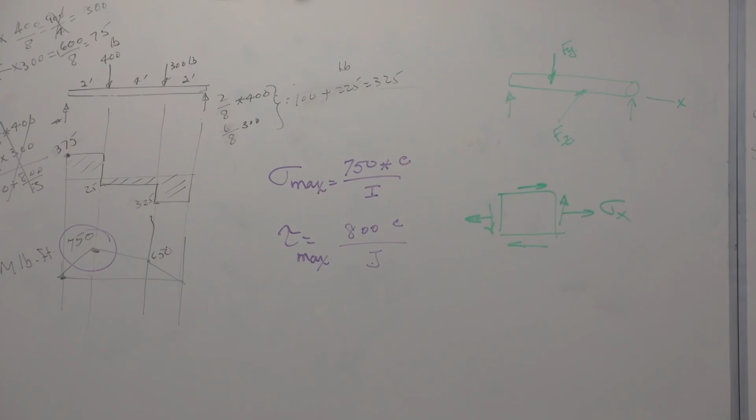Say moment in the y direction, our moment in the x direction, of course, is torque, moment in the z direction. The maximum moment occurs either here or here.

And the way you find it, come down here, call this My prime. And then you combine, you say My max equals square root of My squared plus My prime squared.

Same thing here, Mz prime. Mz max, I shouldn't actually call them that, yeah, I guess it's okay, I'll call them Mz max, equals the square root of Mz squared plus Mz prime squared.

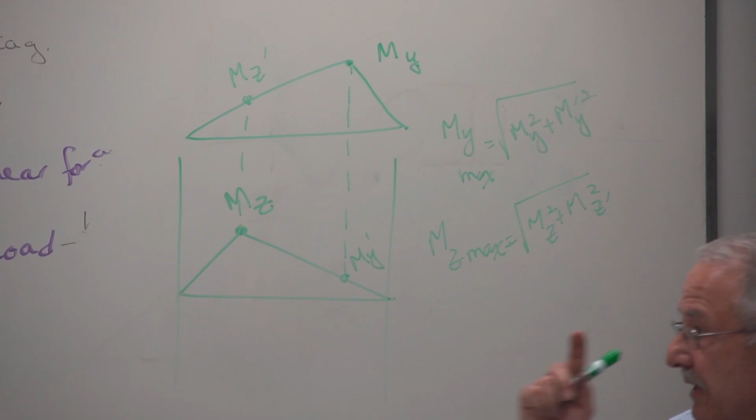You compare these two, whichever is larger, that's your maximum moment. And wherever that occurs, that's where the maximum normal stress occurs. That's what you use in this equation in that case, rather than 750, whatever that comes out to be. That should ring a bell, of course, from 219.

Any questions? I have 3 minutes. Let me talk very quickly about transverse shear. And I'll forego the preliminaries and tell you this.

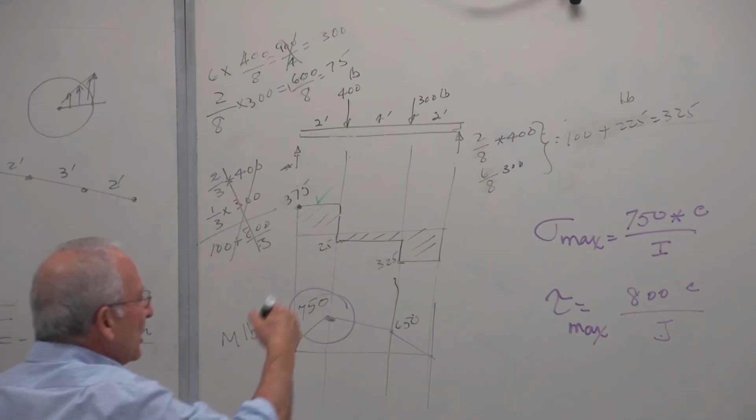Oh, I had a picture drawn with transverse shear, I guess it's not here. This is your cross section. Shear stress will occur in beams loaded like that. At various sections, wherever you have a shear force, there will be a shear stress. The shear stress acts both on a vertical plane and on a horizontal plane, because shear stresses must occur in pairs and on two perpendicular planes.

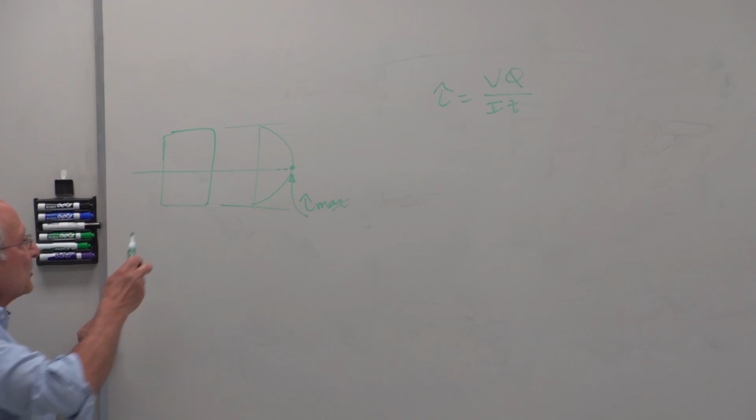The magnitude and distribution of the shear stress is like this. It's maximum at the neutral axis. Its value is found using this equation. V is the shear force, I is the moment of inertia of the cross section about the neutral axis, t is the thickness of the cross section wherever you want to find the stress.

Now, if the thickness varies, this shape will change too. Students have the most problem with the value of Q. This is the first moment of area from the point of interest to the outer fiber, any outer fiber, doesn't have to be the closest, about the neutral axis.

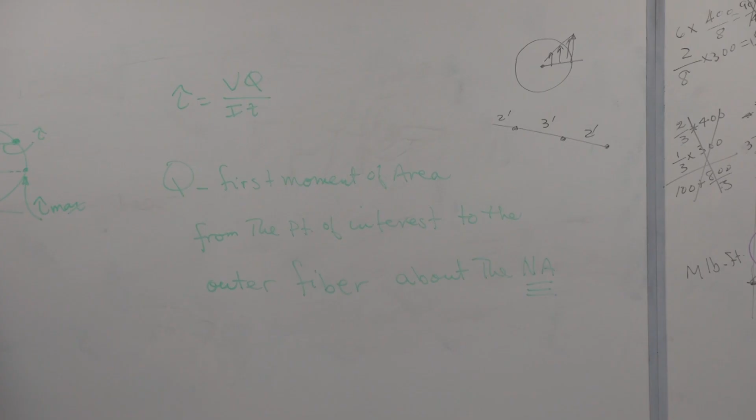So, for example, if you want to find this shear stress, tau, Q will be, we'll call that A, times that distance y, the moment of the area from the point of interest to the outer fiber, either this outer fiber or that outer fiber, doesn't matter, you can go up or down and get exactly the same result, about the neutral axis. Therefore, in this case, Q is equal to A times y, whatever the value of y is, which you can find just using simple geometry.

Okay? Any questions? I think we're done. I'll see you on Tuesday, and we will have a quiz on the review stuff.